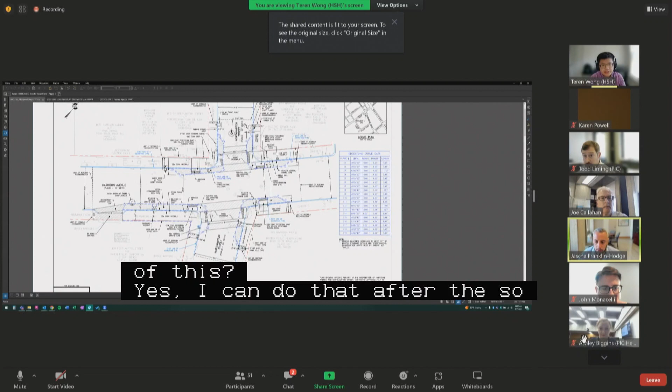We've implemented the Boston Water and Sewer comments and design. They've directed us to move some hydrants and add additional drain manholes here. Also on these plans, you can see the inclusion of new street lighting, control cabinets, pole boxes, and proposed locations for streetlights. The same applies at the second intersection of Harrison Ave at East Lenox, similarly with the Public Works Department street lighting comments. Lastly, at the third intersection at Tremont Street at Northampton, we have also implemented Public Works street lighting comments.

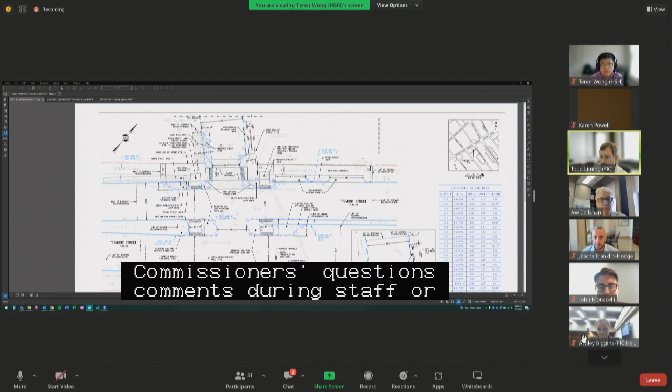Thank you very much. Commissioners, questions, comments? Hearing none, PIC staff or members of the public? I'll take this opportunity to remind the public, if you wish to ask questions or add testimony, please use the raised hand function at the bottom of your screen. At this time, I have no comments and I do not see anybody from the public, so I think we're all set.

All right, thank you very much. Do I hear a motion to approve public hearing number 1? I'll make a motion to approve a joint petition by the City of Boston Transportation Department and the City of Boston Public Works Department for the making of specific repairs in Harrison Ave, Northampton Street, East Lenox Street, and Tremont Street, as read into the record by the chair.

Second. All in favor? Aye. Aye. Aye. Any opposed or abstain? So moved. Thank you very much. Thank you, Commissioners.

On to public hearing number 2, on a joint petition by the City of Boston Transportation Department and the City of Boston Public Works Department for the adoption of a city policy concerning the review and approval processes for electric vehicle charging infrastructure within the city's public rights of way. New business from August 24th. Would the presenters please introduce themselves, their affiliations, and give us a brief overview as well as any changes since your new business hearing? Excellent, thanks, Chief.

Matt Warfield, the new Mobility Director in the Boston Transportation Department in the Policy and Planning Division. I believe a final draft of this was released since our last hearing, though I don't believe many major changes were made. But I'm happy to talk through what this is, add a little more context, and then answer any questions. Essentially, this is for the installation of electric vehicle charging stations in the public right-of-way that are owned, operated, and managed by the city or its authorized contractors.

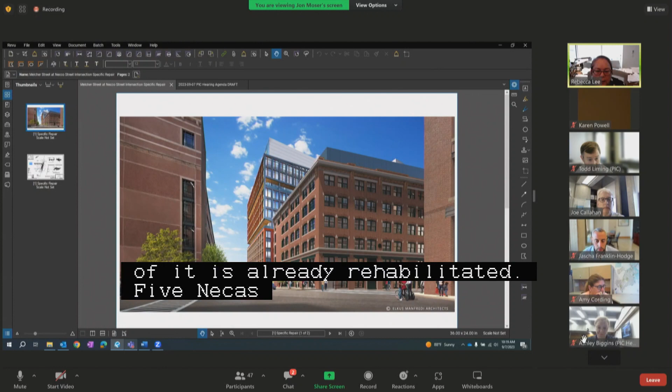With me is Jon Moser from VHB and Naomi Mayu from National Development. John is going to put up a rendering so you can get context. This project is occasioned by the construction of 15 Necco Street, a 12-story, approximately 316,000 square foot life sciences building that will be occupied by Eli Lilly as a lab, research and development, and office facility. In front of it is the already rehabilitated 5 Necco Street building. The intersection you see with the blue car is the intersection we're talking about, right at Melcher Street and Necco. We will be doing a series of specific repairs to bring it into accessibility compliance.

So I'm going to turn it over to John to speak about the specifics. For your information, the proponent is the 15 Necco developer. The co-proponents are other affiliates of Alexandria who happen to own Necco Street, which is why you've got multiple parties involved. John, I'll leave it to you.

Thanks, Rebecca. Just to reintroduce myself, Jon Moser with VHB, I am the civil engineer for the project. What we're proposing here at Melcher Street and Necco Street is a raised crosswalk and two new pedestrian ramps that are partially within the public way. The work will create an accessible path from the Summer Street Bridge to the Harbor Walk, which does not exist today. The project is proposing the crosswalk to be raised as part of the required off-site mitigation by BPDA, which will provide safer pedestrian access and help with resiliency in the area.

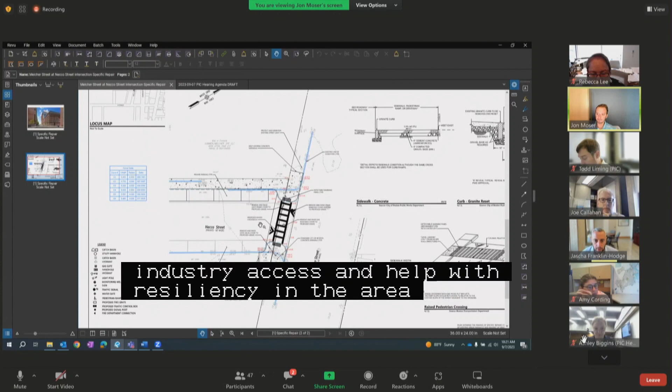Are there any questions or comments, Commissioners? All right, hearing none, PIC staff or members of the public?

Just as a matter of clarification, this project may sound familiar. It's because it appeared under last hearing's new business agenda. There was an issue with some of the legal advertisements, which necessitated the project reappear today. So that's why you're seeing them again.

All right, hearing no other comments, will you be ready for your public hearing in two weeks on September 21st? We will. And my apologies for misidentifying John. Sorry about that, John. No problem. All right, well, we'll see you back in a couple of weeks. Thank you very much. Thank you. Bye.

On to new business 2, Copley Square, Boylston Street, Dartmouth Street, St. James Avenue, Boston proper, specific repairs on a petition by the City of Boston Parks and Recreation Department. Would the petitioners please introduce themselves, their affiliations, and walk us through what is being proposed?

Sure. Thank you, commissioners. My name is Bea Chatfield, and I am a project manager with Boston Parks and Recreation Department, and I am here representing the renovation of Copley Square Park. I'm here with Sasaki today. We've got three members of the design team, and Zach Chrisco is going to be doing some presentation. We are talking about the full reconstruction of Copley Square Park, which includes the fountain, all paving, planting, lighting, drainage, and electrical systems. We're going to be installing new street trees, planters, and new pavement along the right-of-way area.

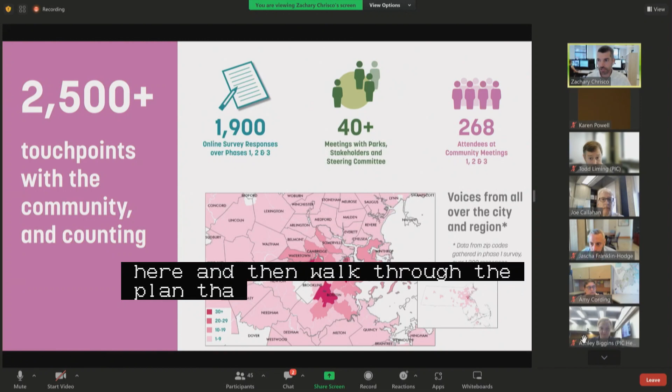So we began working with Parks in 2020. As Bea mentioned, we had a very extensive public outreach process, with multiple thousand folks engaged throughout the course of that project, including from Boston, but also the surrounding communities.

And this is the vision that ultimately was landed upon for a renewed Copley Square. It imagines improving the connections between the major cultural destinations in and around Copley Square, and then forefronting the trees that exist there and putting in a series of systems to protect those.

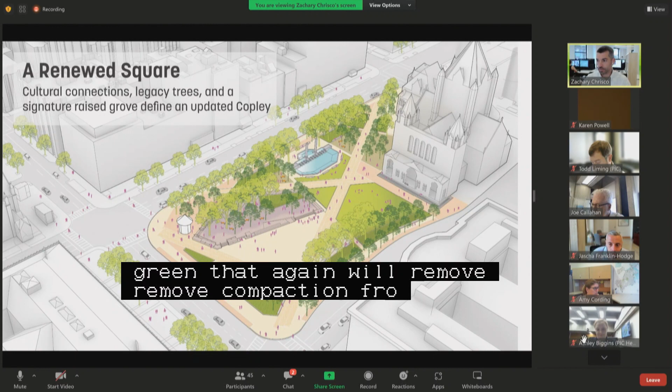We're adding planters along a series of existing trees on either side of the street to protect the compaction of the tree root systems, and introducing a new iconic raised platform element in the square, perched up about 18 inches above grade, which will also remove foot compaction from the set of trees in the center of the square that, from the public outreach process, were seen as one of the major amenities folks wanted to stay.

We're also adjusting the location of the lawn, pushing it closer to Trinity Church, which allows for a little bit of buffer zone from the activities of the square and from the church itself, and creating a plaza that can host farmers markets and events, eventually spilling out onto Dartmouth Street when it's shut down, so it feels like one continuous space.

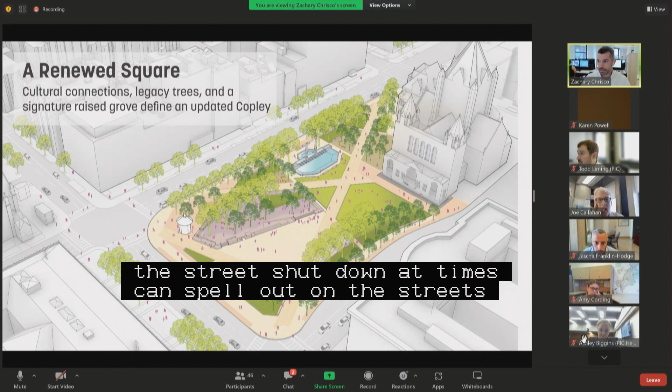We are protecting in place the kiosks that exist at the square and making renovations to the fountain, but the fountain is largely staying in place. So that's a pretty high level overview of what's happening within the square itself.

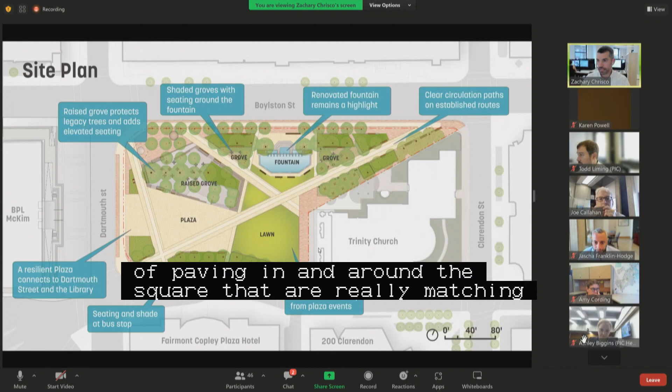We have a site plan showing that same set of moves. The lawn has now moved closer to Trinity, with the main plaza in the center of the square, the raised grove, and a series of paving in and around the square that matches the intent of some of the buildings in the area, trying to be sensitive to the materials at Trinity and the surrounding blocks.

And then a few renderings of what this project will look like once constructed, really trying to create a flexible space that is easy for Parks to maintain and can support a variety of events, from small daily gatherings to larger events.

So we thought we would just walk through the plan that was submitted, and as Dee mentioned, it's been coordinated with a number of folks, again focusing on what's happening in the public right of way. I'm going to try to zoom in here if I can, and I'll just quickly walk through the perimeter of the square.

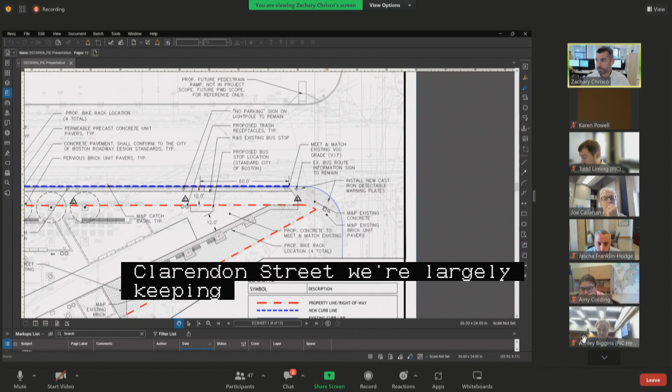At the intersection of Boylston Street and Clarendon Street, we're largely keeping the sidewalk untouched in this zone, aside from providing new cast iron detectable warning plates and handicap accessible ramps. All of the ramps on the square have been surveyed, and those determined to be in compliance with accessibility guidelines are being kept, while those that are not are being replaced. These in this case are in compliance and being kept.

There is a project led by the Public Works Department to make improvements to Boylston Street itself, specifically the northern side of the sidewalk. The companion ramp in that case would be constructed as part of that Public Works project.

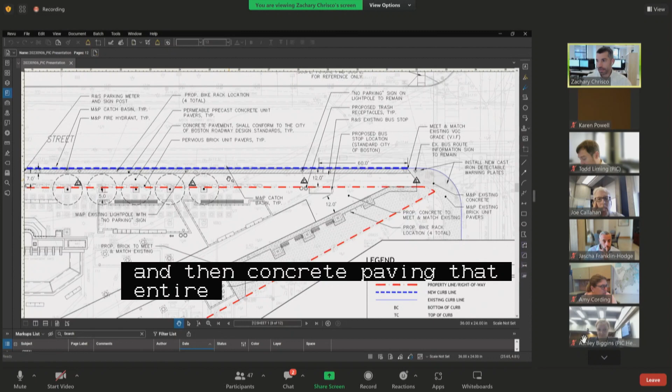Within the sidewalk itself, we are providing a new amenity zone with a set of porous pavers and concrete paving. That entire zone is 12 feet wide. The amenity zone is 5 feet wide, there's 7 feet of concrete paving, and then a porous brick paver band that will extend into the square, supporting the existing trees on site. That's a pretty typical section of what's happening through this zone.

We are largely keeping in place the amenities that exist in the zone, so the light poles and other features will stay there.

And as we move further down Boylston Street, you can see that sort of typical section occurring with amenity zone, concrete paving, and then the brick porous paving.

As we get to the intersection with Dartmouth Street, we are making a number of improvements here, tightening up the radii at this intersection, which was the request of Public Works and others, to a 15-foot radii. So we're taking out the existing curb, replacing it with new curb, reconstructing handicap ramps, and then adding a new pedestrian traffic signal at this location.

And then as we move down Dartmouth Street, you can see a number of the existing and proposed bike racks here. We also had some along Boylston Street. We're largely keeping in place the existing brick paving along Dartmouth Street, and so we're staying out of that as part of the construction process and protecting in place most of the amenities that exist along Dartmouth.

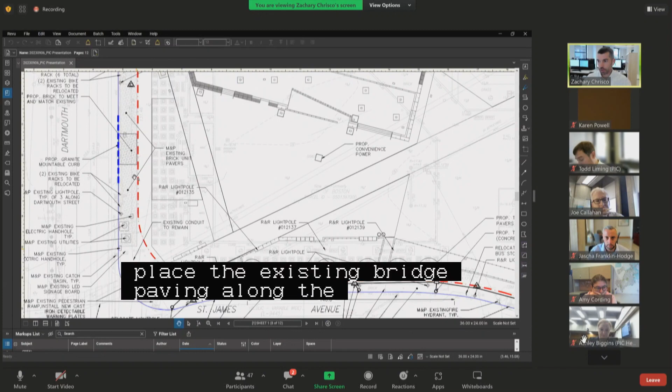Once we get to St. James, we come back to our new concrete paving profile. So all this paving will be new. We've coordinated with traffic and lighting on a series of improvements that are happening to the light poles in this area.

So many of the light poles are further off the curb and are being relocated to the sort of amenity zone type space along St. James Avenue at their request.

We are also proposing to move the existing MBTA bus stop shelters a little bit further back into the site within what will be a new tree and porous paving zone. So those are shown here. And we'll have better accessibility to the curb line, but we'll also create a more open flow path for pedestrians who are walking through that space.

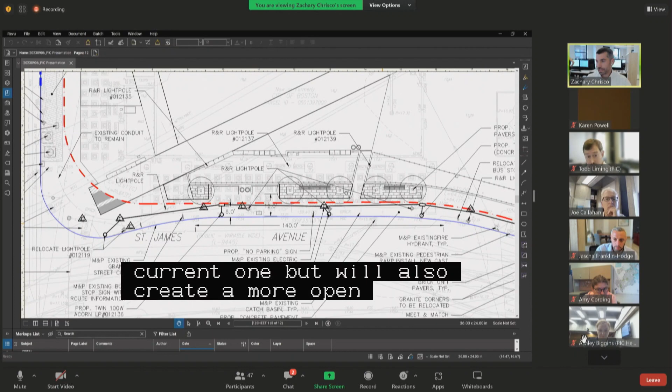And then as we move further down St. James, we are proposing to make some minor adjustments to the Trinity access curb that exists here. The width is staying the same. We're shifting it by a couple feet to better align with where their drive or access is right now.

So that's a relatively high-level overview. I should note, I didn't mention along Boylston Street, we also are proposing to, again, move that bus stop shelter back into the site slightly and are providing an accessible concrete pad for loading and unloading of the buses.

So I hit that pretty quickly, and happy to talk more if there are questions. Thank you very much, commissioners.

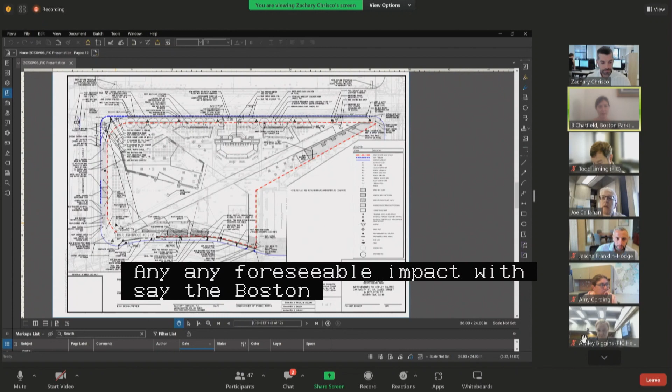I've got a question. Any foreseeable impact with, say, the Boston Marathon? Yeah, we have been coordinating with the marathon, and they will not be in the square in 2024. They are looking at the possibility of putting one of their medical tents, I think, on Dartmouth Street. And so we're trying to see if that's going to work with our timing, because right now we have fencing out by our property line, and they usually take up more than that portion of the sidewalk along the western edge of Copley. So, they're aware that they won't have space in the park in 2024.

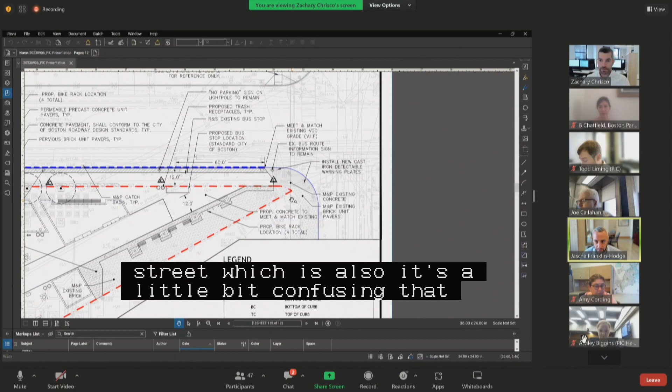Excellent. And the Public Works team is going to take care of the signals and any street lighting impacts as well as part of that? Yep. Signals, street lighting, striping, yeah. That's our understanding. Yep. Okay.

Commissioners, other questions, comments? PIC staff or members of the public?

No, there are a handful of minor plan revisions that are going to be needed for their public hearing in 2 weeks, but the team is aware of it and they've committed to making those changes.

All right, hearing nothing else and seeing no raised hands, would you be ready for your public hearing in 2 weeks on the 21st? Yes. Yeah. All right, wonderful. We are excited to see you then. Thank you very much. Thank you so much. I appreciate it. Thank you.

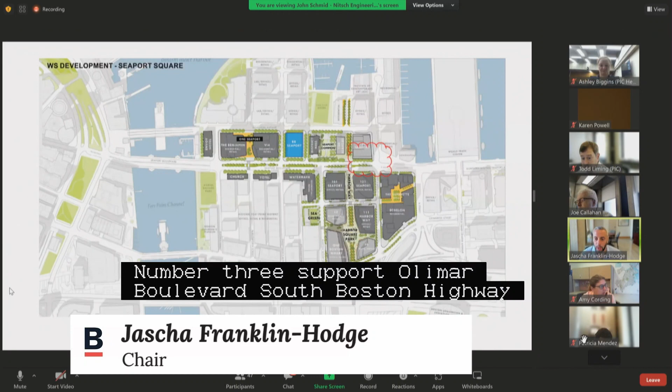All right, on to new business number 3, Seaport Boulevard at Pier 4 Boulevard, South Boston, highway discontinuance, vertical discontinuance on a set of joint petitions by Seaport G Title Holder LLC and the Boston Redevelopment Authority, DBA, the Boston Planning and Development Agency. The presenters please introduce themselves, their affiliations, and let us know what is being proposed here.

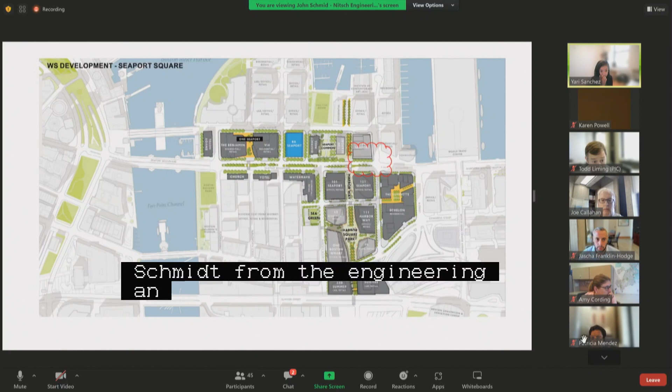I'm here on behalf of Seaport G Title Holder, the owner and developer of Block G of the Seaport Square project, and co-petitioner on the next two petitions. I'm joined by Amy Preen with WS Development on behalf of the Block G developer, as well as John Schmid from Nitsch Engineering. The BPDA is also a co-petitioner on these petitions, so I'm also joined by Maggie Pitts-Dilly of the BPDA.

The petitions before you today respectfully request approval of a discontinuance from the Seaport Boulevard layout of parcel G2, located at the intersection of Pier 4 Boulevard and Seaport Boulevard as shown on this plan. The next petition requests a vertical discontinuance of the below grade portions of the Seaport Boulevard layout known as parcel G1, also at the intersection.

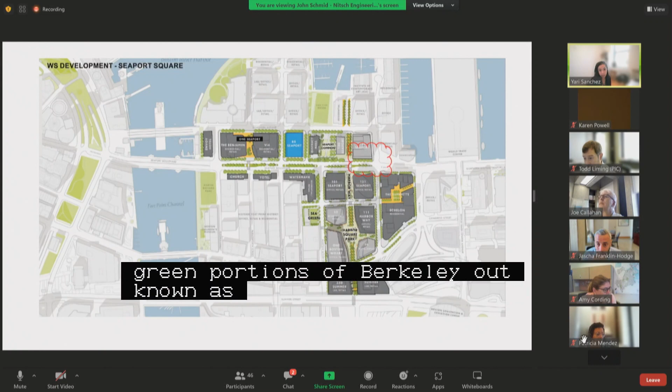These portions to be discontinued will accommodate a subsurface garage within the below-grade discontinued portions of G1 and G2, and a building corner within the above-grade discontinued portion of G2.

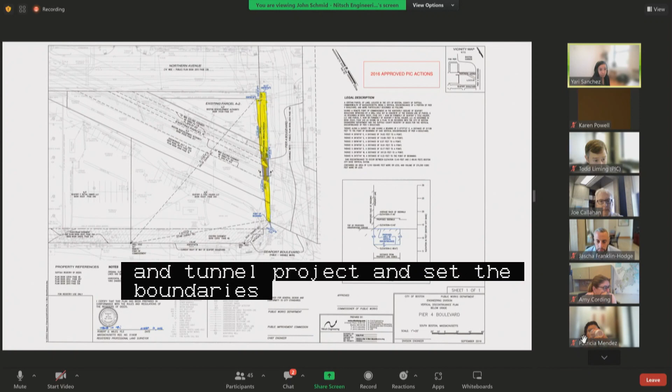I'm launching into a little bit of history here to contextualize our present petitions. We're excited to be here today because the actions before you represent the culmination of a historic plan memorialized in certain land exchange agreements with the BPDA, designed to complete the street grid arising from the Central Artery Tunnel project and set the boundaries of the Block G development site and the adjacent Block F development site. The actions represent the final items in those historic agreements and conclude what we started to accomplish back in 2016 when we were last before the commission on these items.

In 2016, as shown on this slide, the commission approved vertical discontinuances from Pier 4 Boulevard, the below grade portion starting at an elevation of 13.4 down to an elevation of minus 86.6, as well as a vertical discontinuance from Seaport Boulevard at the same elevations.

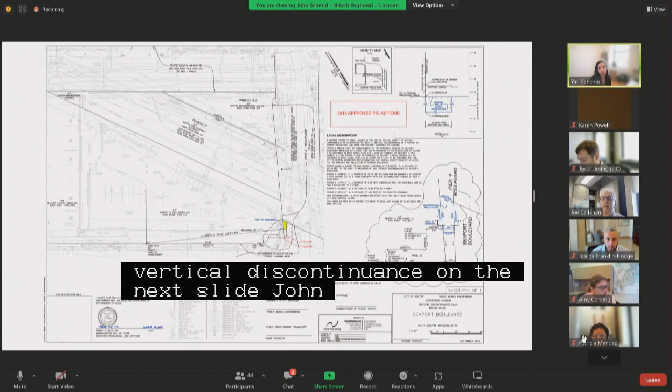The actions before you today for the discontinuances of parcels G1 and G2 were contemplated and shown on those 2016 plans. They essentially continue the strip of previously discontinued area along the eastern boundary of Block G.

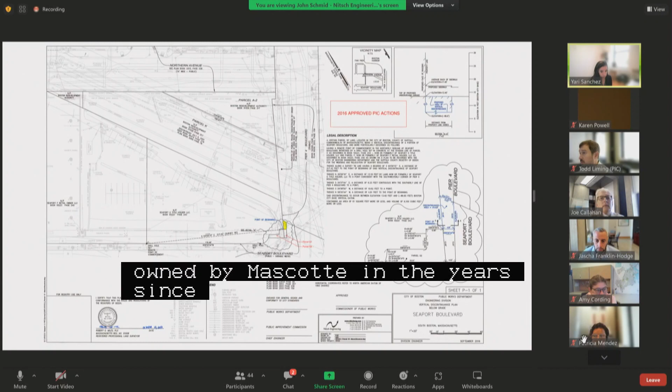At the time, in 2016, G1 and G2 were actually owned by MassDOT. In the years since, MassDOT has conveyed those parcels to the city, and the BPDA will vote next week to take the parcels and convey them to Seaport G Title Holder LLC. This is all in line with the historic plans and agreements.

So the approval of the petitions before you, together with the BPDA actions we just described, will essentially complete the boundaries of the Block G development site in relation to the adjacent streets, Seaport and Pier 4 Boulevard, and will represent the final action under these historic land exchange agreements.

I'll now turn it over to John Schmid to give you an overview of the plans for today. Thank you. John Schmid with Nitsch Engineering.

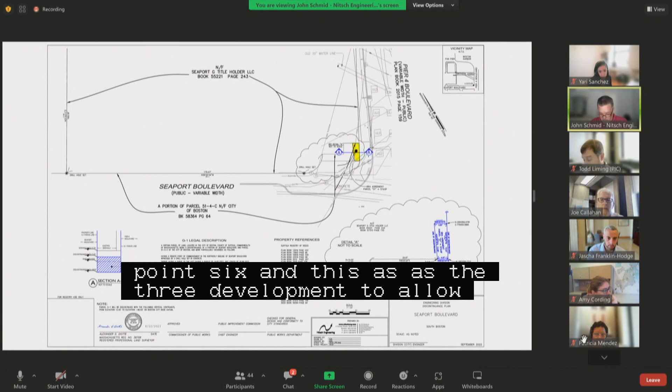So the first petition is parcel G1, which consists of 57 square feet, approximately 13 feet by 4.5 feet, and as stated, it will begin at elevation 13.4 to elevation minus 86.6. As the street develops, this will allow shallow utilities like street lighting and other things to occur above the garage, but below the sidewalk grade. This is the same dimensions that were approved in 2016 for the parcels that were previously submitted.

The second parcel is parcel G2, which consists of 179 square feet. This is basically a complete discontinuance, as from heaven to hell as they like to say, and it would fall within the building itself. So that's pretty much the gist of the proposal before you. Any questions?

The drain line that's in the discontinuance? So the drain line was also part of the discontinuance in 2016, and we're committed to relocating that drain line prior to construction of this parcel.

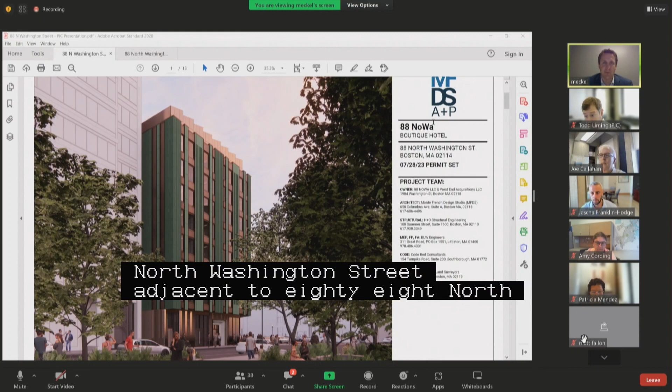By way of brief background, this project did go through the BPDA Article 80 small project review process and was approved by the BPDA board. It also received all approvals from the Zoning Board of Appeal. The lot itself contains 2,188 square feet, and the project was approved as a boutique hotel, which you can see on the screen now, our rendering. This rendering is actually a view from Valenti Way.

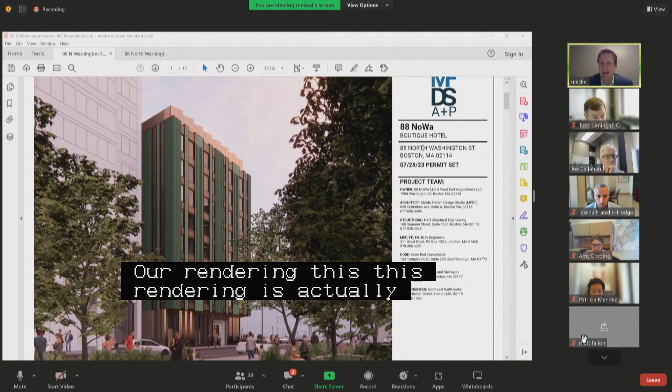Just to bring the commission up to speed, we will be coming back with a companion case for Valenti Way. That's actually a co-petition with MassDOT that's lagged slightly behind this application. However, in working in conjunction with the BPDA, our hope is to get on their board hearing, which we're currently scheduled for September 14th, which necessitated us coming before you today with just the North Washington portion.

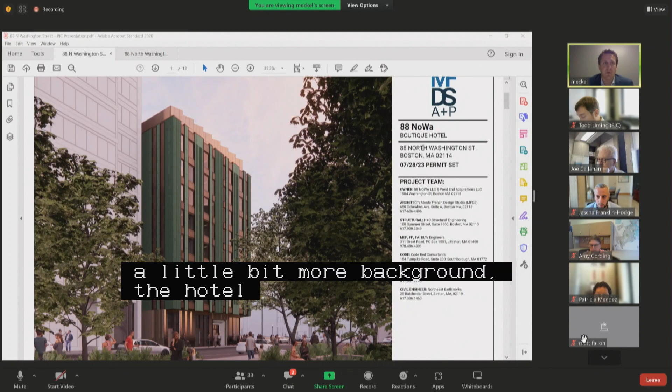Just to give a little bit more background, the hotel will contain a lobby, lounge, and building services on the ground level and hotel rooms on floors 2 through 8. The discontinuance area is proposed to begin at the second floor, as you can see in the picture, approximately 15 feet above the sidewalk, and will extend up approximately 74 feet to the top of the 8th floor. Overall, the discontinuance area for North Washington Street contains 226 square feet and approximately 16,667 cubic feet. I'll pull this up here.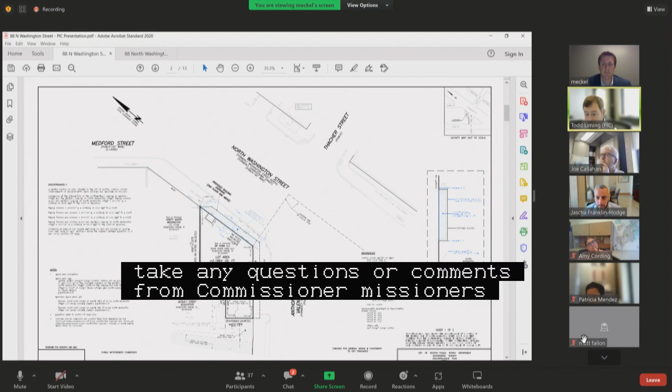Commissioners, PIC staff, or members of the public? All set on this. All right, will you be ready for your public hearing in 2 weeks on September 21st? Yes, we will. All right, excellent. We will see you back then. Thank you so much. Thank you very much. Have a good day. Thank you.

On to new business number 5, 1185 to 1203 River Street, 12 Central Avenue, Winthrop Street, Hyde Park, earth retention license on a petition by CCC River LLC.

Would the petitioners please introduce themselves, their affiliations, and give us an overview of what is being proposed? Good morning, Mr. Chairman, commissioners, and PIC staff. Attorney John Fulgini. I'm here on behalf of CCC River LLC on this petition to install an earth retention system along parts of River Street, Central Avenue, and Winthrop Street. I'm joined this morning by Nathan McPhail from H.W. Moore and Holly Grace from B'nai B'rith Housing.

This request is to fortify the foundation and protect the surrounding property. This request is in support of the approved development of 100% senior affordable housing at low AMIs. This means 63 new units of senior affordable housing at Hyde Park in an area that is very much lacking in affordable housing. This application goes together with a division of neighborhood housing. I will now turn the presentation over to Nathan McPhail from H.W. Moore to go through the details of this request, and we thank you for inviting us here this morning. Nathan?

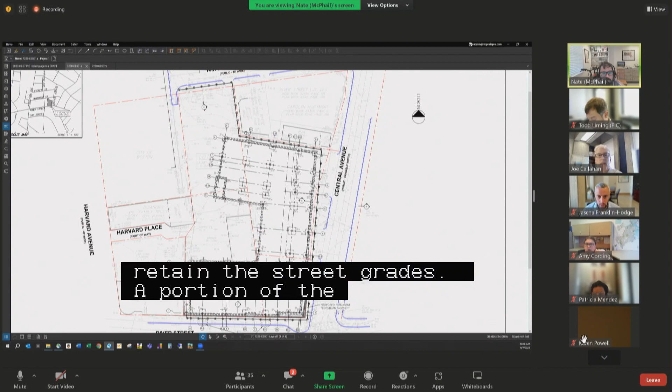A portion of the excavation next to the abutting properties, the portion along River Street and Central Avenue, abutting properties up here, and a portion of Winthrop Street will have or require some amount of supportive excavation to install a proposed retention system up here.

In general, the earth retention system will consist of a drilled soldier pile and lagging system, approximately 24-inch diameter holes, generally less than 5 feet off of the property line. That really is only that much up on Winthrop Street.

Otherwise, it's 3.5 feet, 3'8" from the back end of the piles to the property line. The piles will be cut off to the required 6 feet below grade after the foundation is installed and backfilled, and the grade will be returned and the sidewalk repaired. There are some tree wells along River Street which will be protected during construction. The piles and SOE system will be coordinated so they don't interfere with the tree wells and retain them in place. Since the system will be cut down 6 feet below grade, it won't interfere with the tree wells in their permanent condition, so those can be maintained after construction.

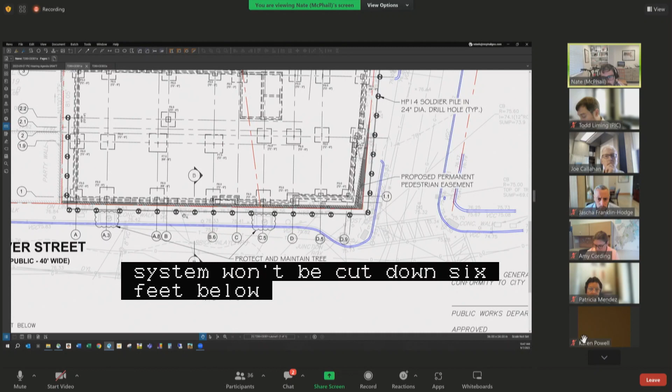I believe H.W. Moore could speak to this more, but there is also a proposed permanent pedestrian easement within the property line. I'm not sure if Fred from H.W. Moore would have more to add on that. That already came before this commission and was approved several months ago. So that's the overview of the system - again, it's temporary SOE just to perform the excavation to natural material as required.

With the tree wells, has there been any coordination with the Parks Department and their Urban Forestry Division around the specifics of protecting the existing trees themselves that are located in those wells?

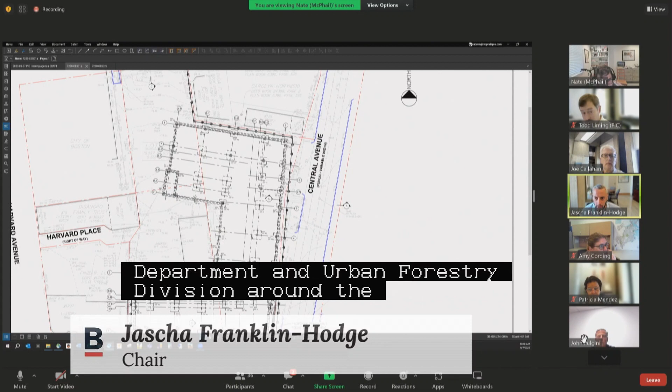Yes, Mr. Chairman, we went through a lengthy Article 80 process which included the Parks Department as well as the BPDA landscape architects to prevent that exact problem if any of this construction would impact that. We're also proposing a significant amount of new street trees because currently they look like Charlie Brown's Christmas tree - if you were to drive by, it's pretty much withered away to nothing because of sanding and salting and things like that. But we've been working extensively with both those two groups.

Okay, yeah, if Google Street View is to be believed, at least one of the two trees is actually mature and healthy, and there's another much smaller, more Charlie Brown-esque tree in that pit. Certainly keeping the one healthy tree in good shape is important as you're doing this excavation so close to the tree root system. And that is our intent, Mr. Chairman.

Commissioners, other questions, comments? Where are you with the public or BTD permitting and your CMP?

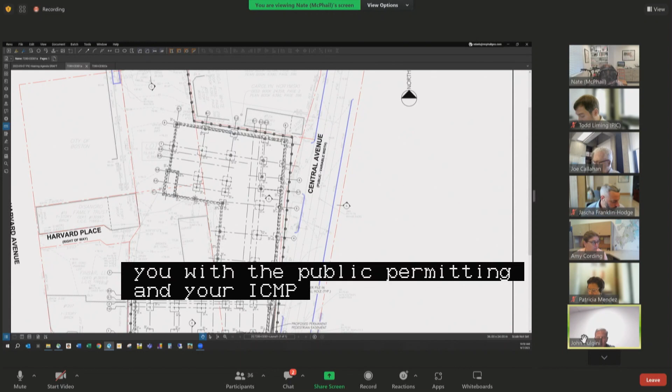Holly Grace is on this call. Holly, do you want to respond to Amy Cording's question with respect to permitting? Hi, I'm Holly Grace with the developer, B'nai B'rith Housing, and sponsor of the development. We have submitted through Howard Stein Hudson our construction management plan. There were a couple of rounds of reviews. We're waiting for final approval.

Do you anticipate having that prior to your public hearing? We would love it - Howard Stein Hudson's been requesting it from BTD. So if you have any suggestions on how we can make that happen, we'd be very grateful. Got it.

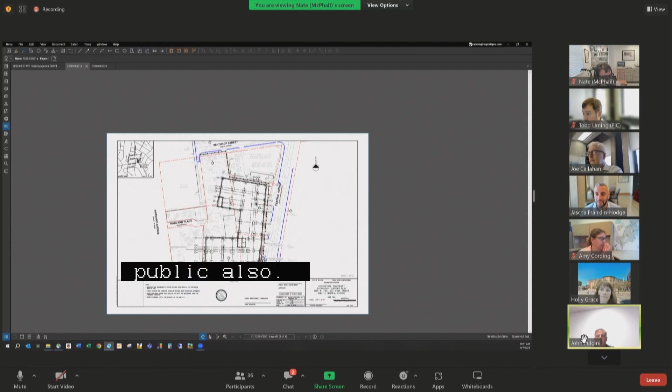All right, any other questions from the commission? Hearing none, PIC staff or members of the public? All set. All right, will you be ready for your public hearing in 2 weeks on September 21st? Yes, we will. All right, we will see you then. Thank you, everybody. Enjoy your day. Thank you very much. Thank you.

On to new business number 6, Brookline Avenue, Lansdowne Street, Boston proper, grant of location on a petition by Vicinity Energy Boston Incorporated. The petitioners please introduce themselves, their affiliations, and give us an overview of what is proposed.

Hey, good morning. My name is Dan Kennedy, I'm the project manager for Vicinity Energy. On the call with me today is RMF, Steve Buckler, who's the engineer on record, and some other folks from Vicinity that'll be supporting the project. Should share my screen here.

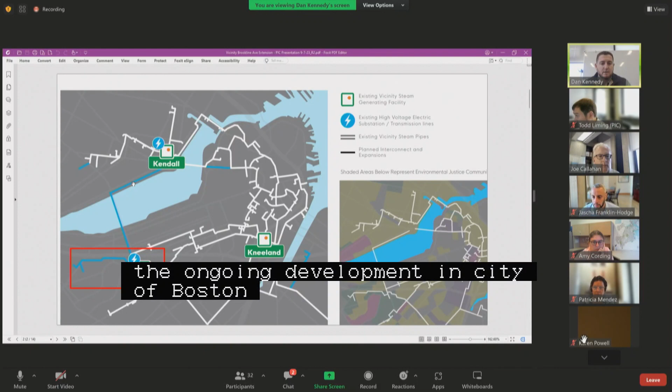So the Brookline Ave steam extension - I just want to start with some background information on Vicinity Energy itself. We are a district energy provider in the city of Boston. The map here, the white line showing existing infrastructure - we have around 20 miles of existing steam pipe. With the ongoing development in the city of Boston, we're looking to expand to serve some of these new commercial buildings. For this project, it's specific to the Fenway neighborhood.

Just a quick overview of the Fenway expansion. The first phase starts over at Mass Ave, previously approved through PIC, and then it's at the end of Lansdowne Street.

Phase 1 was about 3,000 feet. It's currently under construction, scheduled to be in service in Q2 2024. The second phase, which is the subject of this request for grant of location, is another 700 feet down Brookline Avenue. It will be serving 109 Brookline, which will be an E-Steam customer.

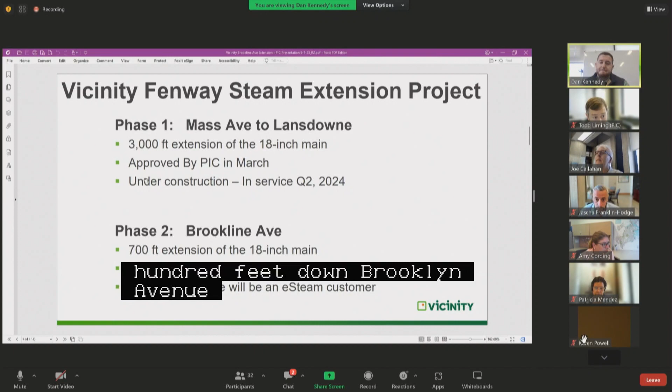Quickly on E-Steam, Vicinity has made significant investments in electric boilers. We have an electric boiler project currently being demoed at Kendall Station in Cambridge, and that's on schedule. At the end of the day, it's to utilize our existing high voltage transmission lines and existing steam infrastructure to provide an energy source for heating that is electrically based. IQHQ, a developer here in the Fenway neighborhood, has signed up for E-Steam for two of their new buildings, both located on Brookline Avenue.

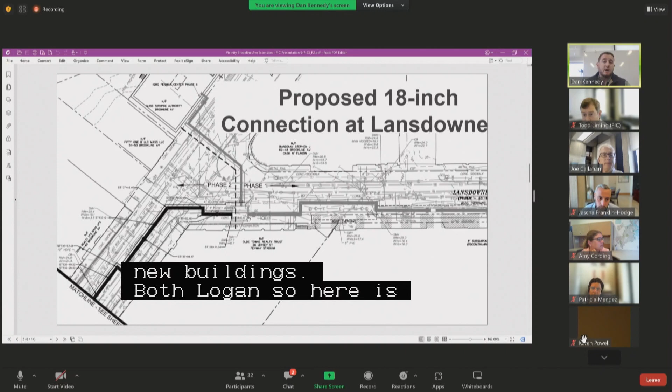So here is a plan view of the extension. The grayed out section is the first phase currently under construction. We will be on Lansdowne Street this winter installing that steam line. At this manhole, we plan to connect and continue the 18-inch pipe down Brookline Avenue.

Just to speak to some of the coordination and why we chose this location as the proposed routing, it really was a collaborative effort with the Red Sox and the other abutters, getting historical information. A lot of these buildings stick out into the street below grade and have a hollow sidewalk foundation, so avoiding that was a challenge and why we are where we are.

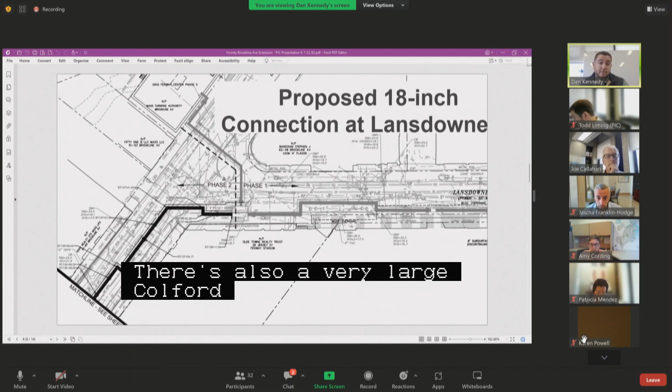There's also a very large culvert, a stormwater management culvert from the Muddy River that redirects it down Brookline to dump into the Charles River. That's a fairly large piece of infrastructure, and that's why we're in the middle of the street here. It was the best spot that had the least impact to all parties and stakeholders.

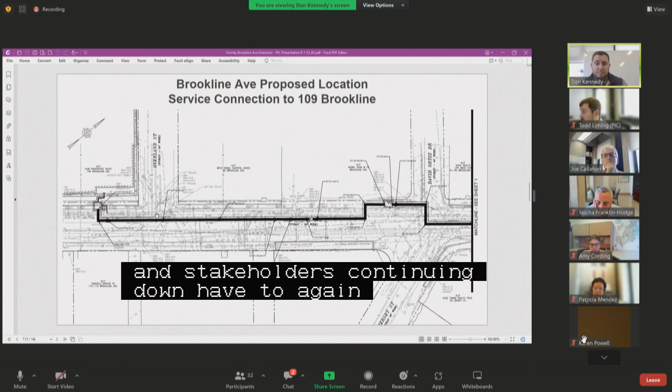Continuing down Brookline Avenue, again the location was well coordinated. We have one manhole that we are proposing to install generally at David Ortiz and Brookline Ave. We are coordinating with the developer for that parcel, which is WS Development, making sure that we're not impacting them or their plans moving forward for the sidewalk and street renovations that may go along with that development project.

Generally, we come down the street here and have a manhole right outside of 109 Brookline, where our service connection is.

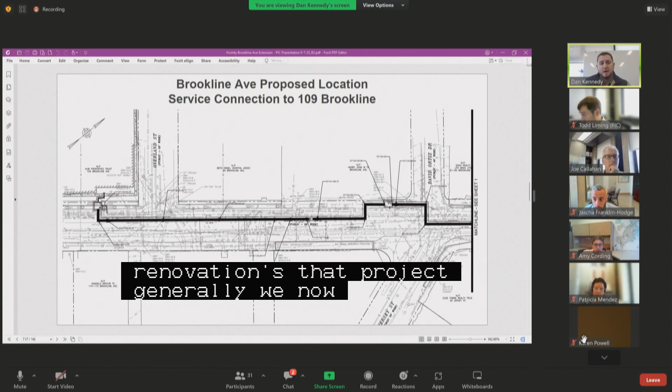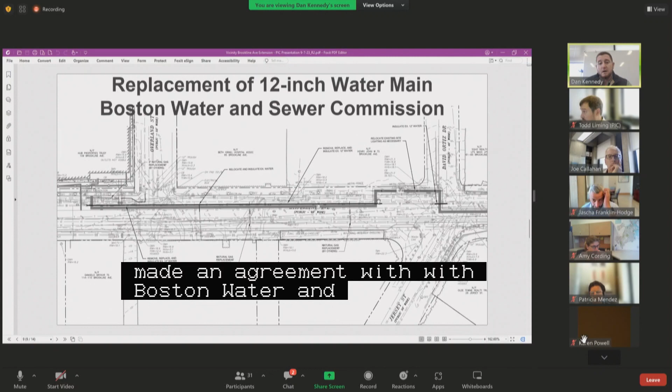Probably the biggest coordination piece we had was a lot of discussion with Boston Water and Sewer. They have a 12-inch water line that we were going to impact, and we made an agreement with Boston Water and Sewer to replace their 12-inch water main for 500 feet along Brookline Avenue, just to ensure we don't have an impact on their system or their customers, and they can allow us to share the street with them. Great to work with them, and I appreciate their time and effort in coordinating with us to get to this point.

So generally, that's the project. Any questions on the first phase or this phase, I'm happy to answer. And that's about it.

Thank you. Commissioners, questions, comments?

This one will need an approved CMP before this can go any further. I know Ed's back from vacation, so hopefully that can be wrapped up, but this one will need a signed and executed CMP.

We've talked to Ed about this, but the ball is in our court to give something to him and you guys that will work moving forward. We'll make sure we have that done for the next meeting.

Related to that, is the plan, assuming the approvals and timelines all happen, to continue the work that's currently underway along Ipswich and Lansdowne and simply keep digging as a contiguous project, or will there be an interim period where you stop work prior to continuing?

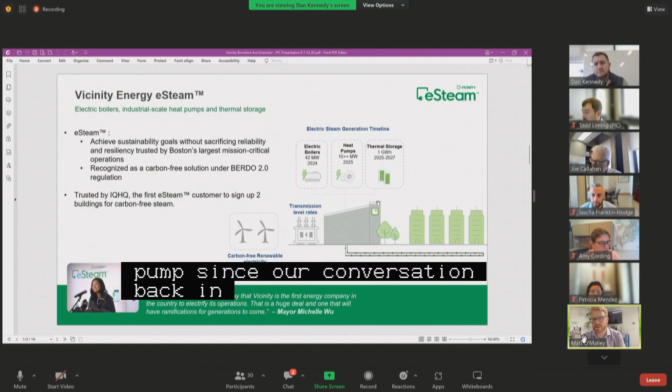Similarly, the heat pump—since our conversation back in March, we've entered into a memorandum of understanding with MAN Energy. I'm heading out with some colleagues later this month to tour some facilities, so we anticipate the heat pump will be delivered in the 2026 timeframe.

Thank you very much. It's great to see that things are on track and that the heat pump piece is getting closer to real. Really appreciate the update and glad to see that work continuing.

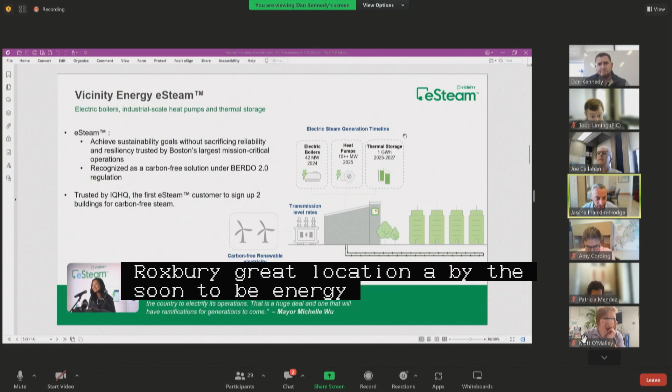Again, I'll be the project manager for the St. Stephen Street project. I have Ken Stanley with Trimont Engineering, who's worked with us on steam piping for a very long time. He'll walk you through this proposed granted location for the northeastern neighborhood and campus. So Ken, please introduce yourself and take us through.

Good morning, Commissioners, and thank you for hearing us this morning. As Dan mentioned, Trimont has been supporting Vicinity's expansion throughout the city and operations for many years, and we appreciate the Commission's support through the process of all of these projects, so thank you again.

The St. Stephen Street Extension Project will expand their system to bring on potential new customers in the St. Stephen Street and Roxbury area. More specifically, this project is to support Northeastern University's upgrade of its own district heat system on campus.

Currently, Northeastern has started phase 1 of its system upgrade. They started in Q2 of this year and will continue through Q4 of 2023. That expansion process is underway—we're potentially about two-thirds of the way there with regards to completing phase 1. The intention is that Vicinity will tie into Northeastern's new Opera Place Steam District system.

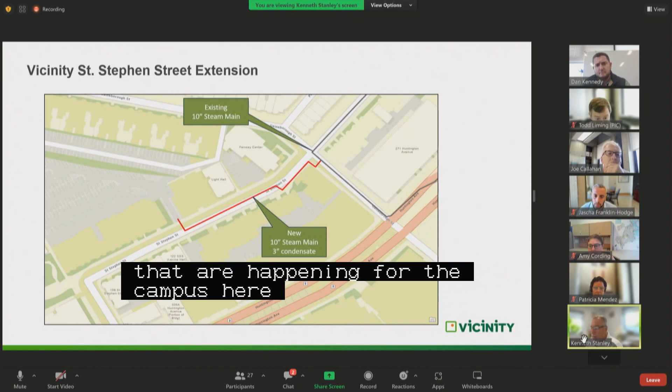So it's very exciting for the campus, and Vicinity is supporting it with high pressure steam and high temperature steam. Currently the campus has low pressure steam and low temperature steam, so it's a much needed upgrade for operational consistency.

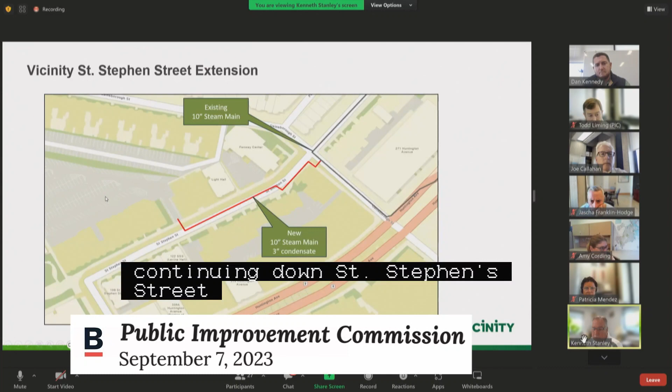Here you can see our alignment tying into the existing 10-inch steam system on St. Stephen's and Gainsborough. In this area, we'll be tying in about the middle of the street at Gainsborough, then continuing down St. Stephen Street and onto Jarvis Place, entering the north lot of the Stetson housing area. St. Stephen Street and Gainsborough are public ways; Jarvis Place is a private way owned by Northeastern University. So in general, that's our locus map.

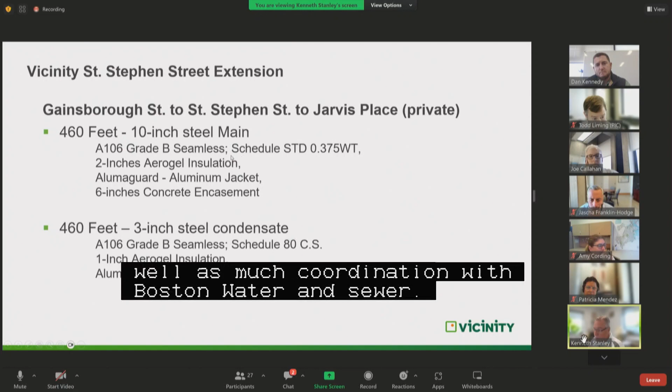We've gone through the design process with Vicinity and the university, with much coordination with Boston Water and Sewer. From Gainsborough Street, St. Stephen's to Jarvis, it's approximately 460 feet of 10-inch steel main, using A106 grade B seamless steel pipe, standard wall thickness of 0.375. We have 2 inches of aerogel insulation wrapped in Alumaguard with 6 inches of concrete encasement around the carrier steam main, and we'll show details. We're also installing 460 feet of 3-inch steel condensate of the same grade, higher schedule, with insulation and Alumaguard. These are standard design criteria for the Vicinity system currently.

We'll walk through the alignment here in detail. This was a highly coordinated effort with Boston Water and Sewer. Our main goal with the overall alignment is to find a location that allows us to construct with the least impact to utility services, vegetation, and trees along the sidewalk area, which is the reason for the crossings, the sidewalk locations, and crossing into the middle of the street.

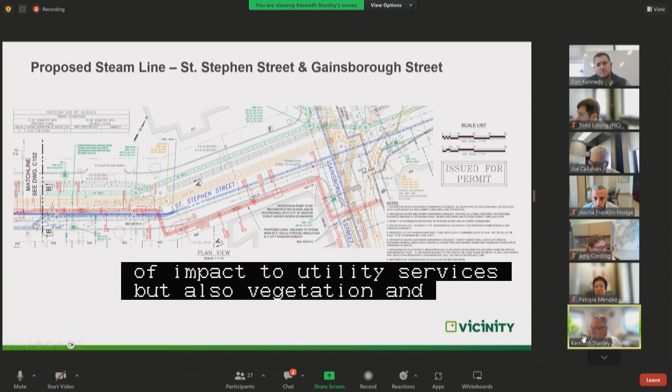So we tie into Vicinity's 10-inch main on Gainsborough Street, crossing over into the sidewalk area to get room for construction and installation, then follow that alignment down St. Stephen Street. You'll see anchors, guides, and expansion joints needed to control the stress associated with steam systems. As we follow along the sidewalk, this is an open area where we have room for supportive excavation, avoiding as many services as possible to prevent relocations or interruptions.

We get to the angle point here where we cross back into the middle of the street, specifically to avoid changing services at the sidewalk level and impacting trees along the sidewalk. By jumping out into the middle of the street, we get clearance from those impacts.

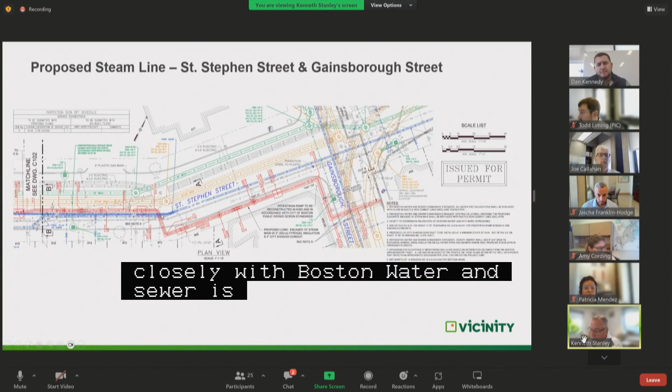Now, while we're in the middle of the street, it becomes very crowded again. So we're proposing, working closely with Boston Water and Sewer, to relocate and replace their existing 12-inch water main built in 1977, moving it to the edge of our excavation to allow supportive excavation and room between the water main and the existing sewer so both can be repaired and accessed with similar supportive excavation. This was a much-analyzed process, and we came to this conclusion and solution with Boston Water and Sewer.

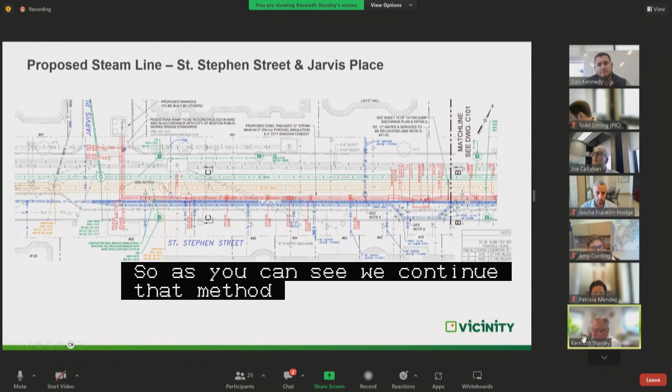We continue that methodology throughout the length of St. Stephen Street until we turn 90 degrees to approach Jarvis Place at our endpoint, where there's a proposed manhole for Northeastern's tie-in location for their new system receipt point. We worked diligently with Boston Water and Sewer to find this solution and allow sufficient space between the existing utilities so they could have room needed to do repairs on the water main, sewer main, and others.

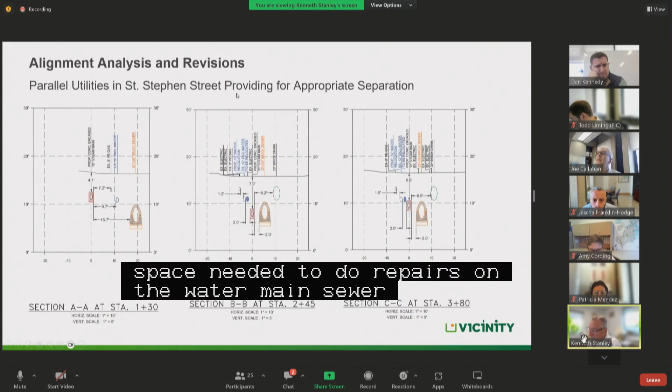We're showing you some cross sections here of how we went through the process of providing appropriate separation between the utilities through the design process. Again, it was much discussion with Boston Water and Sewer, and we appreciate their support.

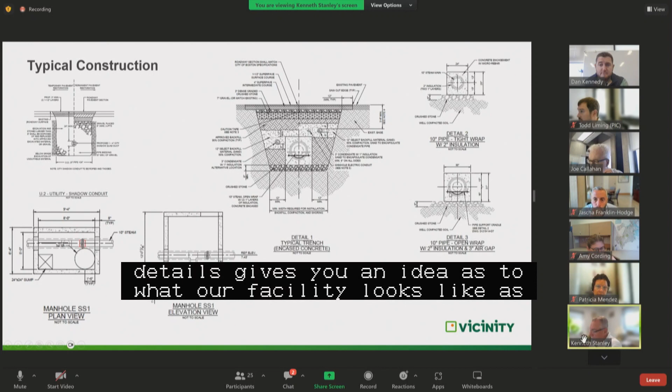Some of these are standard construction details, giving you an idea of what our facility looks like as we're installing it. Our steam main will be encased in concrete, which will also be wrapped in 2 inches of aerogel insulation, a high quality heat retention insulation material. This is a standard design process for Vicinity today, implemented over the past number of projects over the past number of years, and we've gotten great performance from this material.

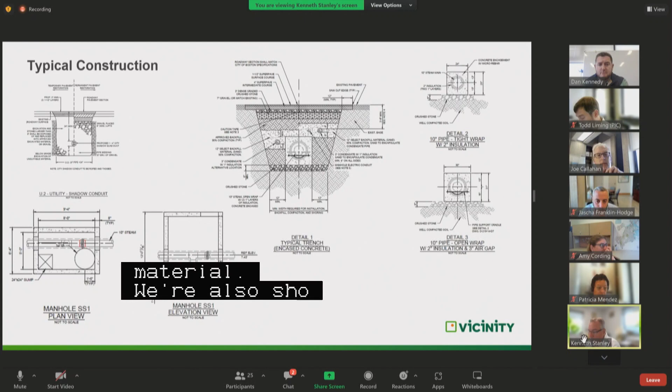We also have a manhole about midway through the alignment down St. Stephen Street, for a steam trap location to collect condensate water and manage it appropriately. The valving would happen at the manhole at Northeastern's property on Jarvis Place, and also on the upstream leg of the Vicinity system at an existing valve location, so this system can be isolated for repairs and whatnot.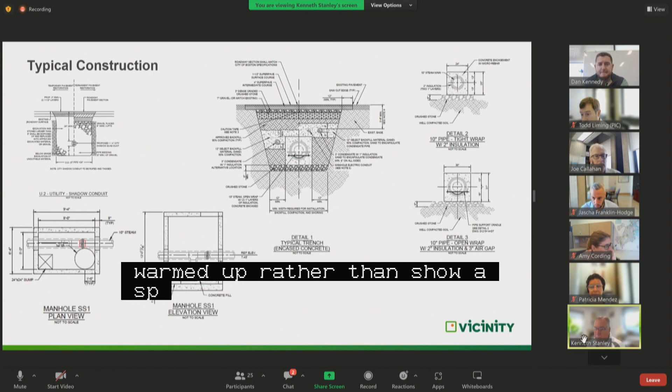We've also included the detail Todd had mentioned regarding the shadow conduit. We've been asked to provide locations along the alignment where handholes might be located to access that shadow conduit. Rather than show a specific location as we construct, we're suggesting we spot out where those handholes might be, but allow construction and trench arrangement to dictate where the shadow conduit lies within the trench. We'll know better as we get through construction what part of the trench profile that shadow conduit would lie, and we'd show that on an as-built drawing.

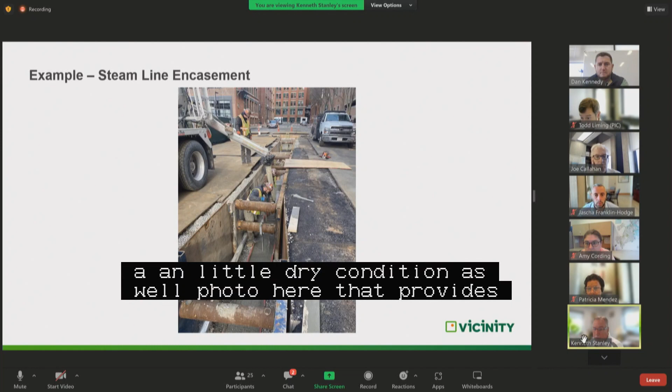Here's a photo that provides an example of the construction methodology, how this would work. This is a similar dimension pipe. You can see the conduit, the concrete conduit being poured in place in the supported excavation. So this would be a very similar process for installing this project.

And that's our alignment. Thank you. We're welcome to take your questions. Commissioners? I will ask a couple then, hearing nothing else.

What is your plan for restoration of both the street and the sidewalk that will be impacted by this? And can we, as you have done in a number of your other projects, request curb-to-curb resurfacing for any street that may be impacted here?

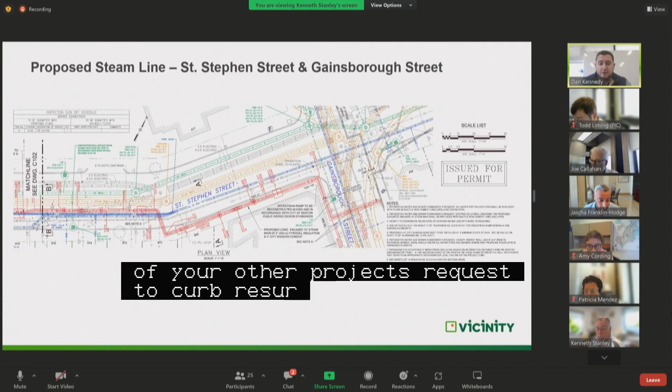Yeah, sure. For the sidewalk locations, we will restore like new and do the pedestrian ramps per Boston's new spec. That's something we need to add to our package that Tom had requested, which we will do. For the street itself, currently we're planning on doing a permanent patch of the trench and having CIU and BTD review the trench and permanent patch, but not curb-to-curb milling and overlaying.

Happy to have further discussions on that. As far as cost goes, it's not something we can really pass through to our customers, so it's a capital cost that hits the project directly. But we want to work with you guys and improve the public realm around this new steam line, so happy to have further discussions regarding curb-to-curb.

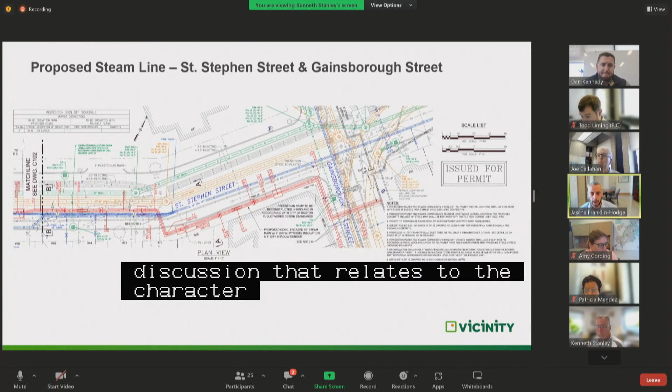Okay, I think it would be worth us discussing between now and your next hearing. Certainly we appreciate that not all of these costs are absorbable by your customers, but as you say, this does significantly impact the public realm in the area, and so we want to make sure we leave it better than how we found it as this project is installed, and it will be a place where you guys do business on our public right-of-way.

Related to that, and potentially more significant, at the intersection of Gainsborough and St. Stephen, I see on your plans you had one curb ramp that you were intending to restore. I'm wondering about reciprocal ramps and the remaining fourth ramp of that intersection, and whether you could commit to providing a compliant pedestrian ramp at each of those locations. We typically don't like to do just one part of a ramp or one side of a crossing and not address the other sides as well.

So, yeah, I don't know if I'm fully understanding your question. We're happy to do that — we've got to rip up the sidewalk anyway at the location we're proposing, so happy to put it back however the city would like it.

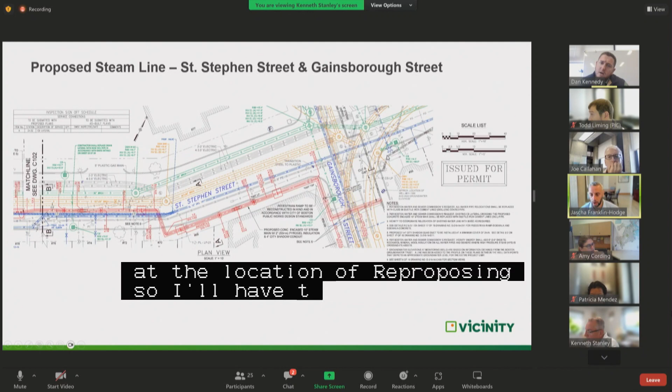We're talking about the reciprocal ramps on the other corners. So if you're going to need to install a compliant pedestrian ramp on the corner where you're ripping up, that you're showing on your plan, but right now there are not compliant pedestrian ramps on the other corners. Providing a ramp to get into the street but not to get out of it does not do anyone any good. So what we'd like to see is for you to do reciprocal ramps — because it's a full intersection, that means making sure all four corners end up with compliant pedestrian ramps.

Yeah, that makes a lot of sense. Let us take a look at it. I don't foresee that being an issue. Okay, and I will follow up with you to have a discussion. I don't think that is so much an issue, but we can discuss that and also the paving as well. All right, and thank you very much.

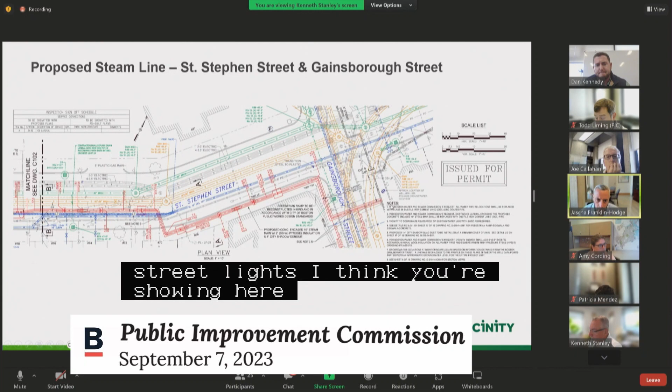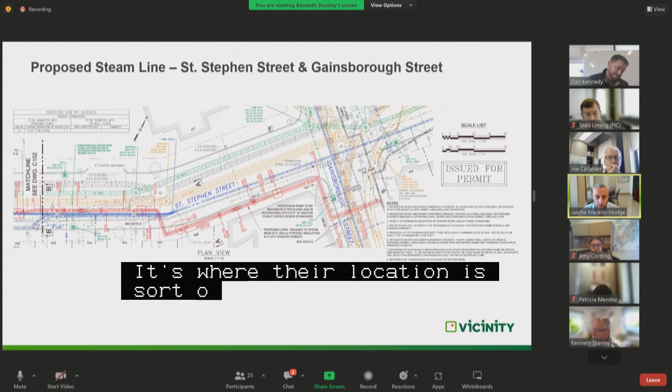The last question I had was about one of the streetlights shown here on St. Stephen, the first one down from Gainsborough on the sidewalk area where your pipe is going underneath. That appears to be a Verizon small cell streetlight. So I'm wondering if you've coordinated with them about whatever infrastructure they have connecting that streetlight — they may have fiber in addition to separate power coming in off the street. If you have not, can you coordinate with them and address whatever impacts there are in your plans? It looks like your pipe is going directly underneath their location, so we want to make sure their conduit location is addressed as part of this. Their stuff is also way deeper than our streetlights, so if you're going under it, you're going much further than a standard streetlight.

We'll do that. Jascha, we'll make sure that Verizon is aware and we have whatever information they can provide. We've gotten to them once already through the design process, but we'll go back to them to ensure that whether they have more information or not, we'll reach out and make sure we're coordinating with them.

Those were all of my questions. Other commissioners, other questions? PIC staff or members of the public?

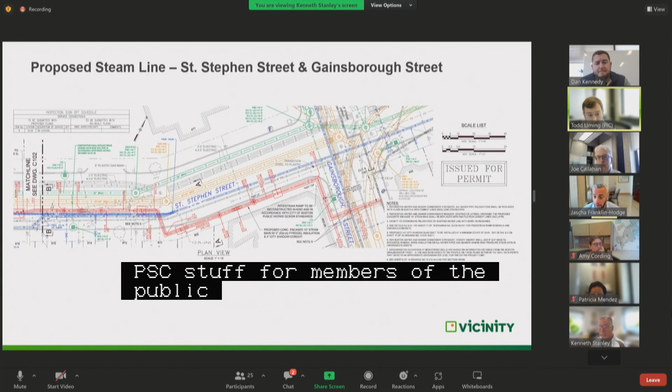All set. All right, ready for your public hearing in 2 weeks, provided we work through these issues? Yes, we are. Thank you for your time. All right, excellent. Thank you very much. We'll see you back on September 21st. Thank you very much.

All right, on to our final new business item, new business 8, 3371 Washington Street, West Roxbury, pedestrian easement, specific repairs on a set of petitions by 3371 Washington Developer, LLC. Petitioners, please introduce themselves, their affiliations, and give us an overview of what you are proposing to do.

Good morning, staff, members of the public, and commissioners. My name is Matthew Zaroli. I'm a civil engineer, and my colleague Dillon Lammers is presenting the screen. We also have Allison Savage, who's the architect from Utile, and Brian Goldson, who is the owner's representative from New Atlantic Development. The building being proposed at this site is a 5-story affordable senior housing facility.

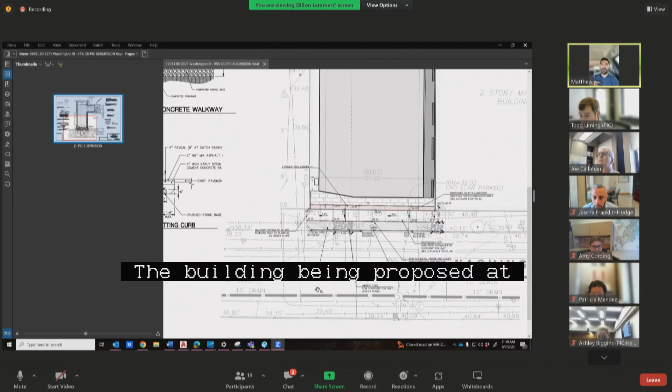It'll have about 39 units, and we've already coordinated with Boston Water and Sewer for meeting their requirements for stormwater treatment. You can see some of the trench drains on the east side of the project.

As far as the specific repairs, the main focus is closing an existing curb cut, reducing that curb cut and moving that D-stone west approximately 20-30 feet so that the entire frontage of the site will be a sidewalk. It'll be an accessible sidewalk both within the 5-foot right-of-way in the street, in the sidewalk, the city property, and we're also going to add a 2-foot pedestrian easement as requested by the BPDA and Disabilities Commission onto our property to match the neighbors. That whole frontage will be existing, will be accessible concrete sidewalk.

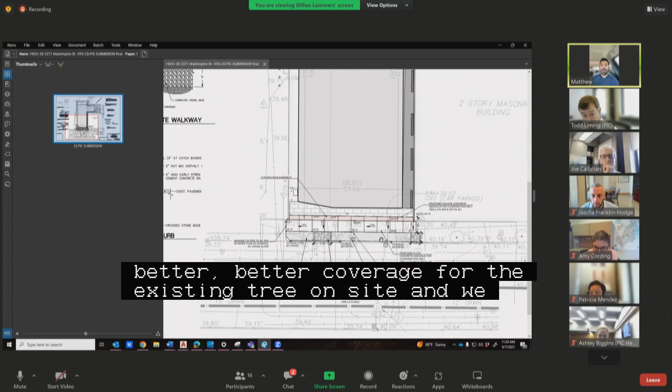Additionally, we're going to provide permeable pavers along the frontage, the back of curb, along with a new tree box that you can see there for a new street tree, as well as a tree box on the east end to provide better coverage for the existing tree on site. And we were also going to work with the green infrastructure request to put structural sand under the proposed sidewalk so that the trees have a little bit more room to grow.

Other than that, we're just matching the existing curb line, and we'll be treating all the infrastructure in place as requested with the utility companies, maintaining the existing light pole, replacing the box cover for the electrical handhole, and resetting the rim if needed for the electrical manhole that you see there, just adjusting that frame slightly. And that's our proposal.

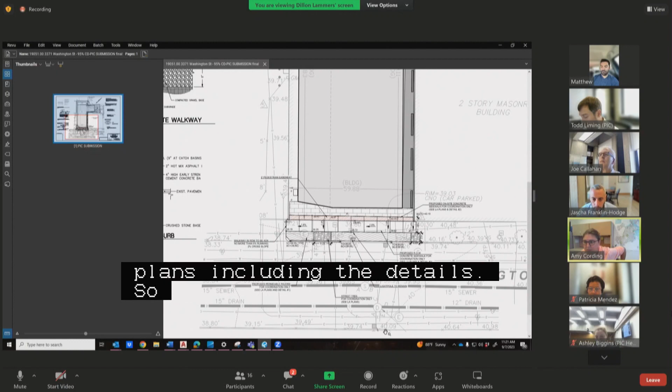Commissioners, questions, comments? My question's just about all of the notes on the plans that say for coordination only, see landscape architecture plans. Everything that's approved here needs to be on a plan as proposed, not referencing other plans, including the details. So whatever is going out here that is subject to a specific repair should just be specific repair plans and not refer to other ones. Okay, understood. We'll update that. We'll incorporate those all into one set of plans and remove those note callouts.

Other questions, comments? PIC staff or members of the public? No, all set. Appreciate the project team being flexible in what they're proposing here, and we'll expect to see that pedestrian easement plan in the next 2 weeks.

Roger that. Great. Will you be ready for your public hearing in 2 weeks? Yes, sir, we will. We will see you on the 21st. Thank you very much. Thank you, everybody.